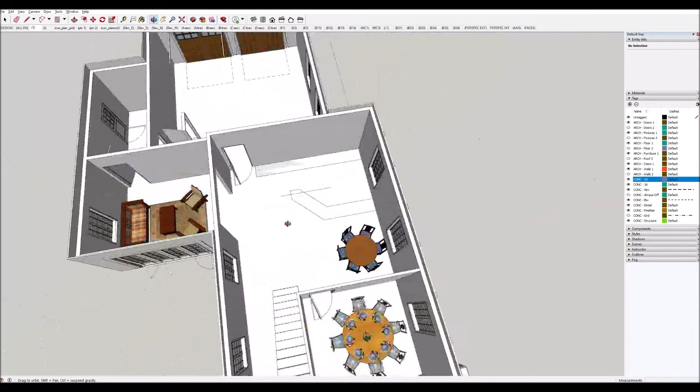There are a couple of practical constraints to keep in mind. The window facing the front has a low windowsill, 28 inches, necessary to maintain the symmetry of the front. A 28-inch window means we can't run a standard 36-inch counter across in front of it, so we don't have the option of putting the sink there. That's going to control some of how we lay this kitchen out.

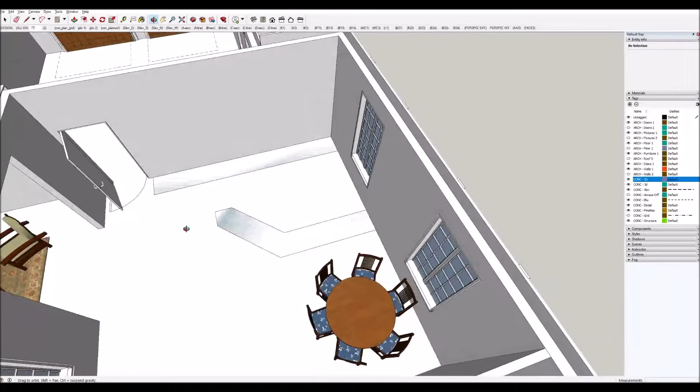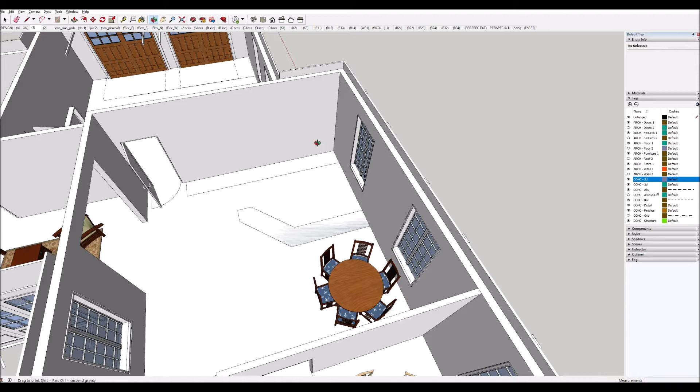Also, we've got this nice long stretch of wall, about 17 feet, available to us, so that cries out for stove, refrigerator, pantry, cabinets, things like that. Also, with the sink not under the window, people typically don't like staring at the wall when they're at the sink, so the sink probably won't go against that garage wall facing the garage. Rather, it will go somewhere in this stretch of counter. So those are the general constraints.

Some other practical points to keep in mind: people like to talk about how everybody gathers in the kitchen, and that is true. However, that's not something people engaged in cooking particularly like. So I try to arrange these kitchens when I design houses so there's no thoroughfare through the kitchen, no reason for anybody to go into the kitchen workspace other than to work in the kitchen. That's a general principle good to hold onto in the vast majority of cases.

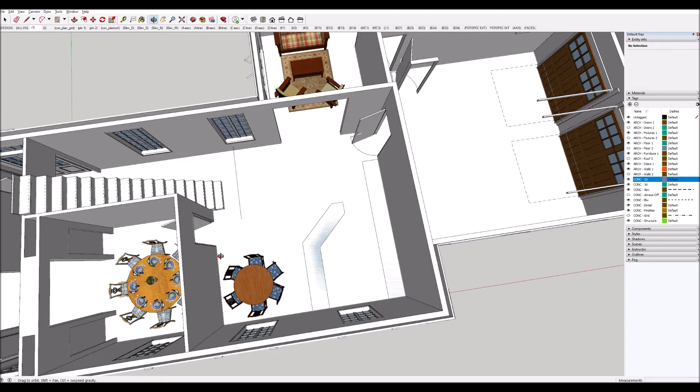Also, put things in the central workspace that need to be there, and don't put things in there that don't need to be there. So I have this stretch of cabinets coming out to the end here, and I'm thinking this end of the row could be devoted to something like a spot to make a cup of coffee, or wall ovens, things that are not part of the main activity of cooking and washing up.

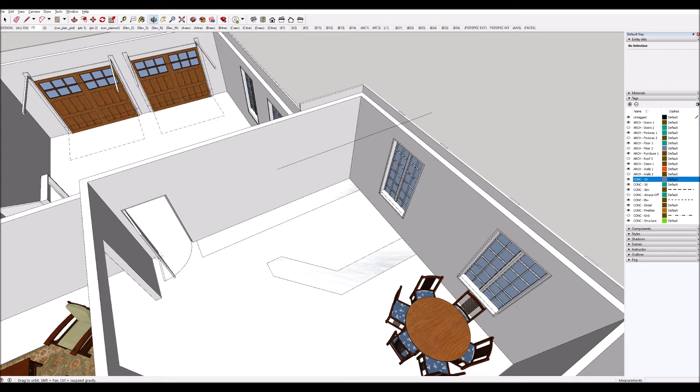Okay, let's take a look now at what I've got started. So I have a file, like I showed with doors and windows in the previous video, that's just kitchens. In it I have a whole bunch of appliances, cabinets of various types, corner cabinets, different kinds of sinks. I also have entire kitchens I've done on other projects. If I'm happy with a kitchen and think I might be able to reuse it, I just drop it into this file and come back to it.

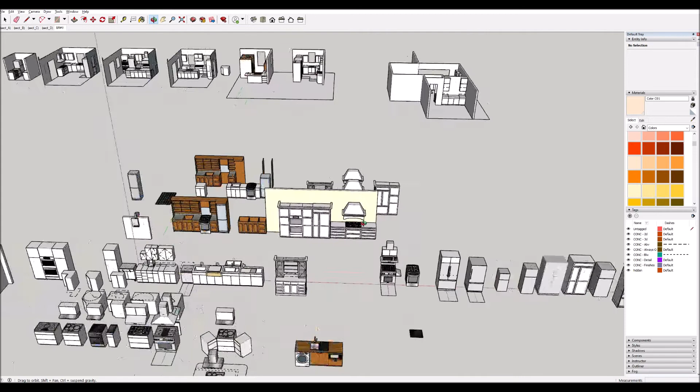So here's my first go at that kitchen, which is just to run a bunch of stuff along that garage wall. I figured a nice hood over the stove makes a nice focal point for a traditional country kitchen, so that's my starting point in terms of design, to put the focus around the stove area.

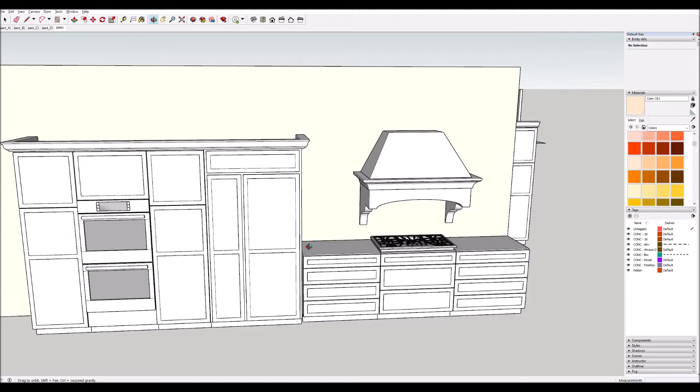So I started by laying out a simple cooktop, some cabinets to support it, space on either side to work, and a nice hood over it. Then I ran the refrigerator and wall ovens off to one side. The result didn't quite work for me — this left section is massive and kind of overpowers what I'd wanted to have as the focal point. So I rethought that a little bit, and we'll get into that in a moment.

But before we do, I wanted to say one or two more things about practical points to keep in mind. For a start, I think it's critical for safety reasons to have at least a foot of counter space on each side of a stove. I never put a stove right up against a corner so one side is blocked. This is because if you've got something on the back burner you need to pull off in an emergency, you want to be able to reach it from the side and pull it to the side — you do not want to reach over the front burners. So always put at least a foot on each side of the stove.

Ditto as far as the design of this hood — I did not bring these bracket things down to the countertop surface because they would block access to the back burners.

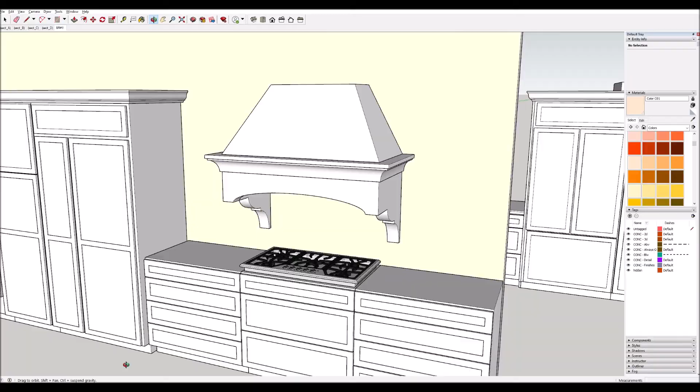It just seems like a much more practical solution. So those are some practical points and safety points to keep in mind. Now,

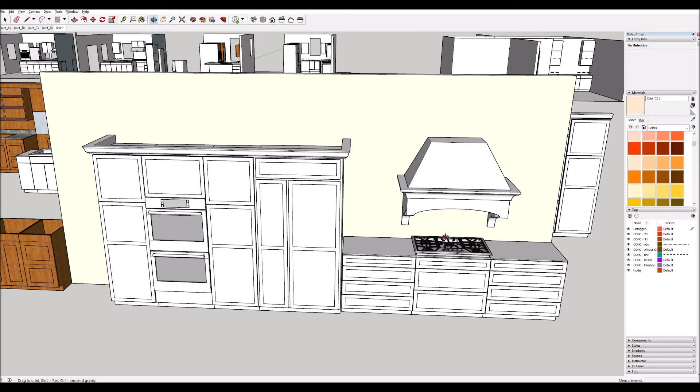Not being quite satisfied with this because of the mass of this stuff, I decided to see if I could find a way to break this into two parts and put them on either side of the stove. I also decided to eliminate the two ovens and go with a range and an oven underneath the range. That was partly just because I decided I needed to reduce the overall bulk if I didn't want this thing to look like it was looming in the room.

Also, it's 2 feet wider than the space I have available on the floor plan. I wasn't concerned about that when I did this first layout. I just wanted to have this layout and see how it looked, and figured that if I know I can adapt it. So I'm in the process of doing the adapting right now.

So I'm going to eliminate the wall ovens and just go with an oven under the range. That means that the pot drawers that I like to put under the range, when I have a cooktop, I like to put pot drawers right under it because I like to put storage near where things are being used. That's another basic principle of kitchen design: store things near where you use them.

Anything that you use regularly - if it's something you use infrequently, then sure, you can store it somewhere else. But if you're cooking, you want to have your pots and pans close by. So I usually put pot drawers right underneath the cooktop, and then I put smaller drawers on either side in order to pack in more things.

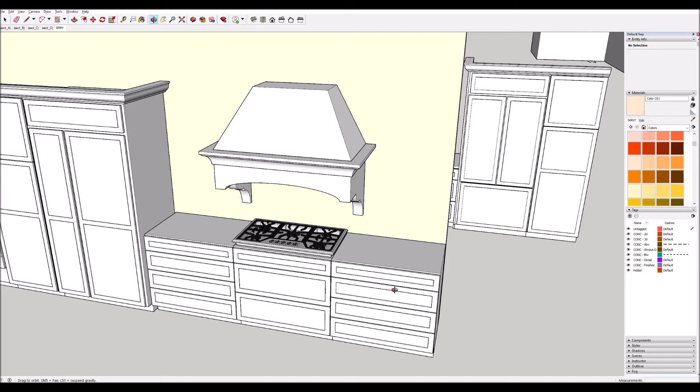Well, since we no longer have - since I'm going to go with a different arrangement here, and I'm going to make a slight adjustment here, so I'll pause this. Okay, back. I did that so that I could make this all just a little easier to see.

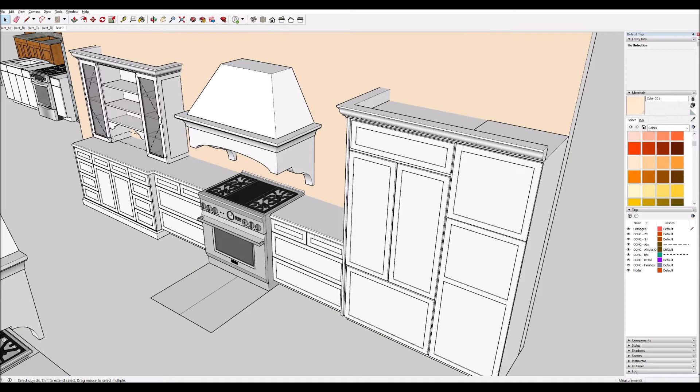All right, we have a range with oven underneath and drawers, cabinets on either side with pot-sized drawers so that I still have my pot-sized drawers. I've gone from a 42-inch to a 36-inch refrigerator, and I've put a 24-inch pantry cabinet next to it.

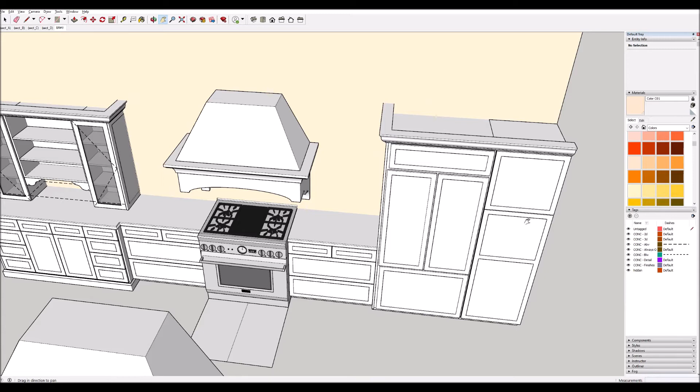That's all on the right side. So we've got a 36-inch fridge and a 24-inch pantry cabinet. And on the left, I have this little arrangement, which could serve as a great little coffee corner place, so that somebody doesn't have to go into the kitchen workspace to make a cup of coffee. Also, as an alternative, this central part of the cabinet here could be removed, and this could become a knee-hole space so that a person could use this as a little desk area.

Oftentimes people like to do their monthly bills in the kitchen and want a little dedicated space for that. So that's an alternative that could easily be adapted by anybody after the fact.

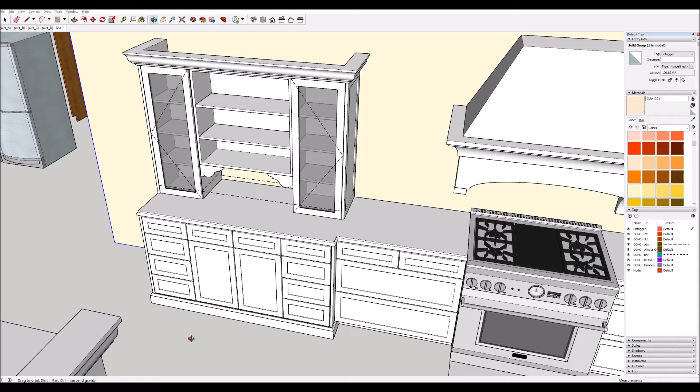So this arrangement here is still a little bit too wide for the space I have available. So the next thing I'm going to do is make a copy of this and make some adjustments to it. For example, the 36-inch cabinets on each side of the stove, I may reduce down to 30-inch cabinets. That'll gain me a foot of space.

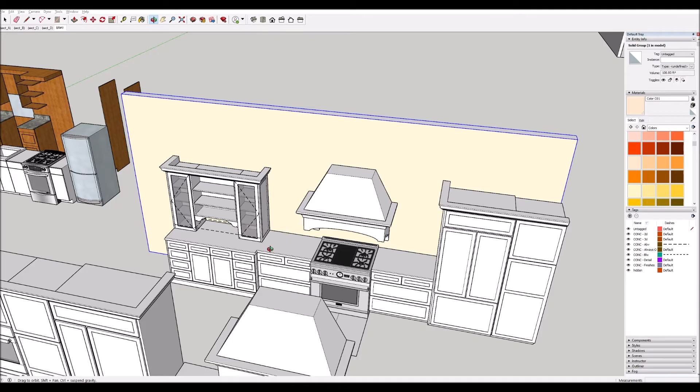Okay, a quick look at progress here. I've made the changes to the array of cabinets against the garage wall. What I've done in order to make it fit, I needed to remove about 2 feet off the length. I had about 19 feet, and I needed it to be about 17 feet.

So I have taken the pantry cabinet and reduced it from a 24-inch wide cabinet to an 18-inch wide cabinet. An 18-inch wide cabinet is still very practical. You can still store a lot of stuff in it.

And then I've taken 9 inches off the cabinets on each side of the stove. So instead of 36-inch cabinets, they're 27-inch cabinets. That adds up to a foot and a half. So between the 6 inches off the pantry and the foot and a half off of these two cabinets, I was able to leave this nice unit intact.

I liked the way that had turned out. I had developed that for another project, and it was nicely working in with this scheme. So I was able to keep that kind of buffet piece intact, and I think it's a nice end.

Now the door is squeezed slightly. I have 6 inches to the corner. The door is a 36-inch door from the garage to the kitchen, and I really could reduce that to 2'8", from 3 feet to 2'8", and I'm going to do that. I haven't done it yet, but I will be doing that so that the door and the cabinets don't have a conflict.

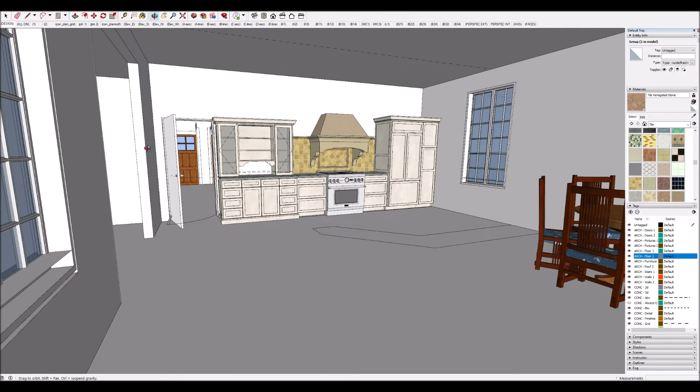I have a second door from the garage into the house, which leads through the mudroom, and that's a 3-foot wide door. So if there's a particularly large item that needs to be moved out of the garage and into the house, it can be taken through the other door. Meanwhile, a 2'8" door from the garage into the house is not

impractical. Did a little suggestive tile design. That's the sort of thing that needs to be done in more detail with the actual tile, but this at least suggests a direction for the work.

And then let's see, you can see where the peninsula counter is going to go. And the last thing I'll mention is the hood.

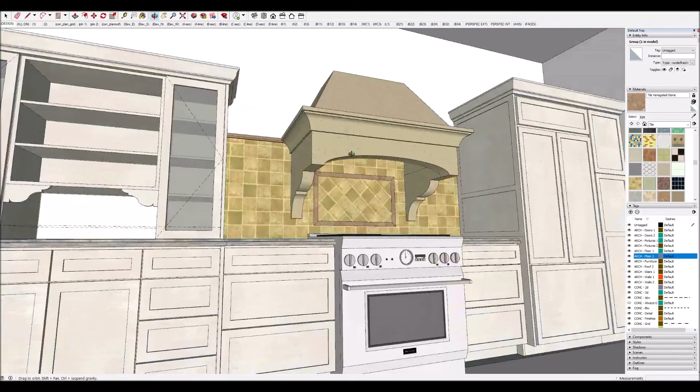Didn't carry it up to the ceiling because, in fact, with the hood against the garage wall, we've got a nice opportunity to use a hood that has a remote blower that keeps the noise of the fan out of the kitchen. So there would be a hood inside there, and then the actual blower would be inside the garage, up behind it, on this wall up here.

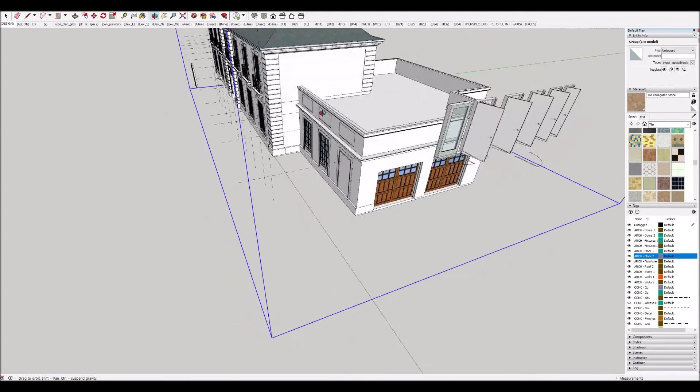And then we can vent it straight out of the roof of the garage, which is this roof deck up here. So in this corner, we'll work out an arrangement to vent the hood. And that keeps it from being vented out the wall in a location where it would disturb the front elevation.

So something to keep in mind when you do have that, when you do put a hood in, you need to keep in mind how it's going to be vented to the outside. I do not recommend hoods that are not vented to the outside. I always use hoods that vent to the outside.

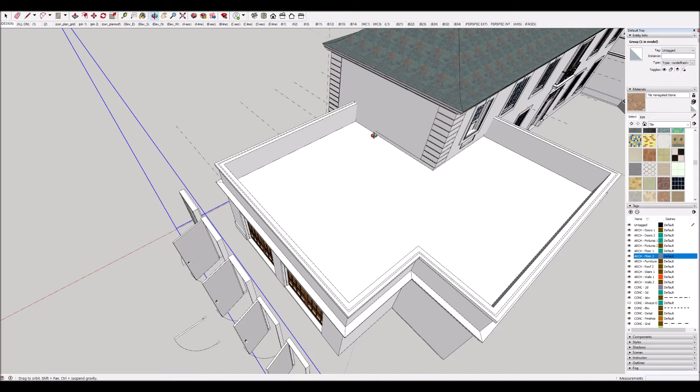One last point before we leave this: the refrigerator is a little deeper than the 2-foot cabinets. This is common, most refrigerators are deeper than cabinetry. This one's only about 2 inches deeper, some are as much as 6 inches deeper.

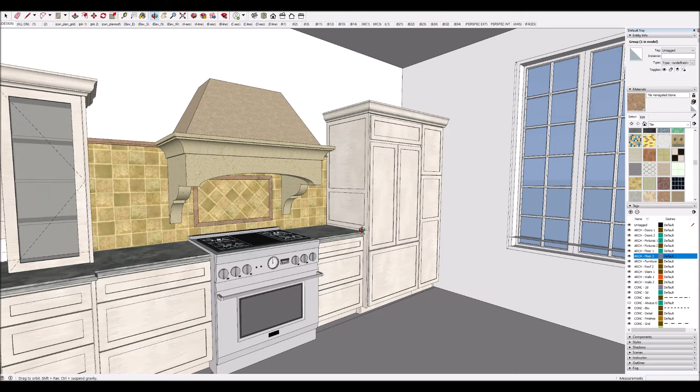You can get refrigerators shallow enough to fit within the 2-foot depth, but those tend to be pretty tight inside. So in this case I let it project out 2 inches from the adjacent cabinet. When I put this buffet in, although I originally used 24-inch cabinets in the design I took this from, in this case I've pulled it away from the wall.

Let me check that - yes, 3 inches away from the wall. So instead of a 24-inch deep cabinet, these are 27-inch deep. And these wall cabinets are set 15 inches deep instead of 12. I pulled it forward so it matches the projection of the refrigerator part.

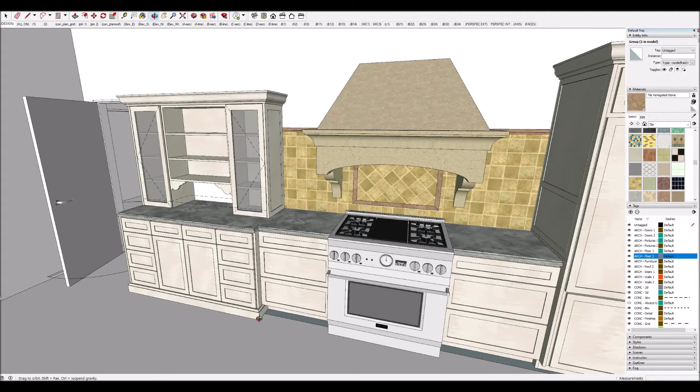And I've given it a base molding rather than a toe kick, so that helps it read as a separate, freestanding entity from what's adjacent to it.

Now I would have done the base molding on the refrigerator cabinet as well, but I believe these refrigerators typically can't have the bottom blocked with base trim, because I think they use it for ventilating the motor. So that's something I'm not going to do.

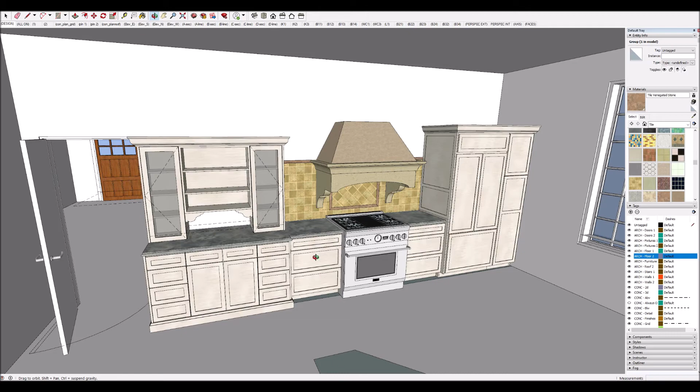But this does help give the impression of the buffet being a standalone piece of furniture. Now I'm going to make one more alteration to the buffet - I'm going to raise the top of it so that it matches the top of the refrigerator.

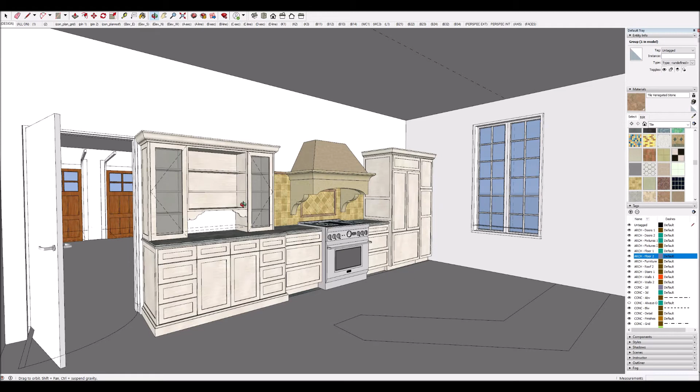I'm going to see if I can come up with a satisfactory design that allows me to do that, because I think it will be an improvement, make things a little more balanced. We'll see that when we come back with the finished run of cabinets for the sink.

So here we have the finished arrangement for the kitchen, all the cabinetry and appliances. I have not done all the finishes in the room, so these blank surfaces are not going to remain that way, but I'll get to that in the next video, which will be all about interior finishes.

So how did it end up? Well, I adjusted the buffet cabinet to align with the top of the refrigerator and added a little tile in the back there. I raised it 6 inches, which elongated these cabinets to what I think is probably the maximum in terms of how they look. Any more than that and they start to look too tall and skinny.

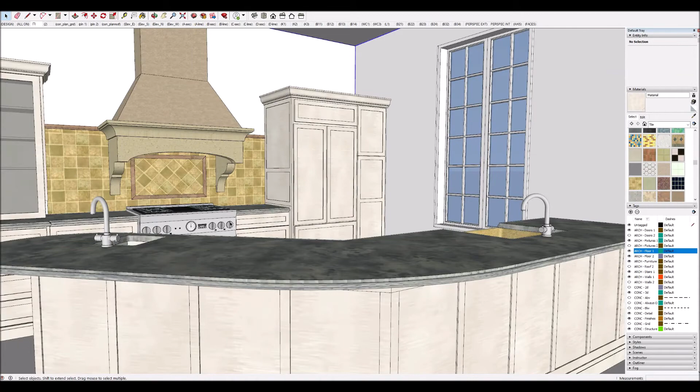And then I did the run of cabinetry related to the sink here. I'm going to take this up and we'll look at it from above.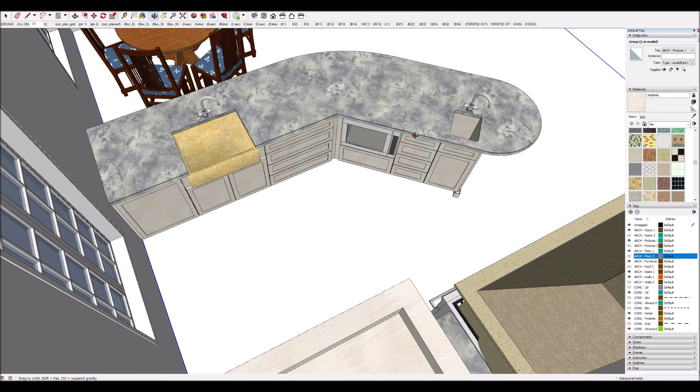So on the sink side, we have a dishwasher at one end next to the sink, drawers for silverware, plates, and things like that - things coming out of the dishwasher can go into these drawers. I have a cubby, a cabinet with a cubby that fits a microwave. There's room for a drawer under that, a few more small drawers, and then a prep sink at the end.

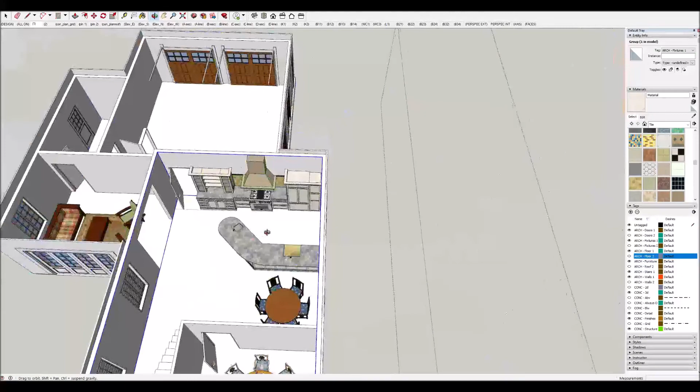I've extended the countertop to be 3 foot deep, which enables people to pull a stool up to the other end of it. It's not intended to be a full eating area - we've got a breakfast area right here and a dining area right there, so it seemed redundant to go further than that. I think keeping it simple is probably preferable on this occasion.

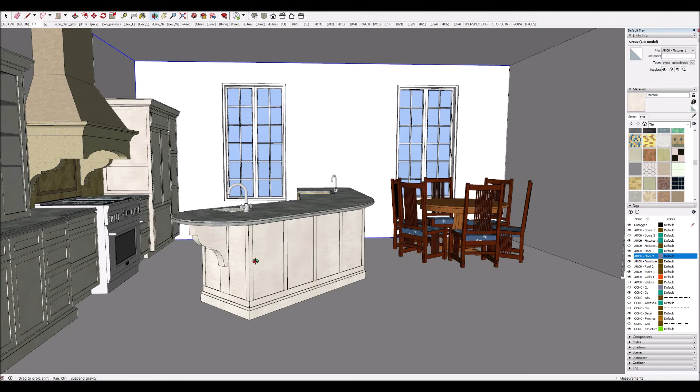Come back in here and line up our view again. There's a bit of an overhang on this end of the countertop and a little bracket there to support the end of it. I'm not entirely convinced I got this bracket where I want it to be - might be a little bit too bulky, but I can fiddle with that later.

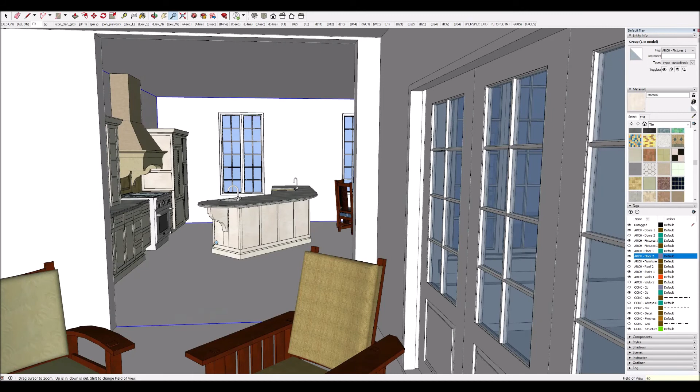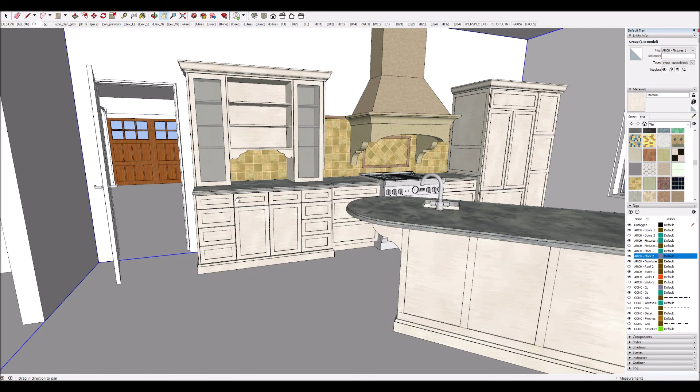Here we are inside the family room corner, looking towards the kitchen. To the left here is the door that comes directly from the garage, and I did reduce the width of that door from 3 feet to 2 foot 8 inches in order to provide enough space to do this run of cabinets as I wanted.